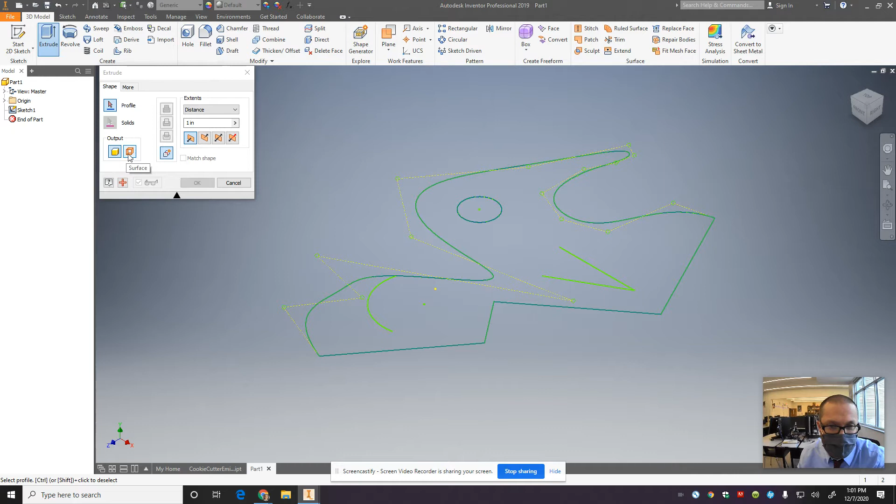So to select just the lines, you go under output to surface. This will extrude whatever it is as a surface. Once you select one line, you have to hit OK, then do the other lines. I don't think you can go back.

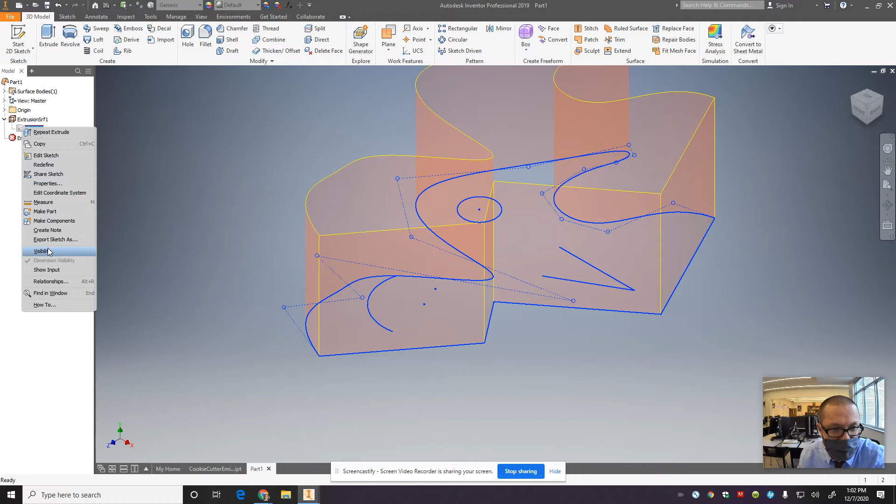But if I want them to be different heights, like let's say I want that one to be that high, I have to do them separately. And of course, your sketch disappears after the first extrusion, so you have to turn the visibility back on. Now I'm going to extrude the other one.

I'm going to do it also, because watch, when you try a solid output, it can't find those green lines because they're not closed, right? So you can select there, output as a surface, and select those lines. You have to hit the profile arrow every time you click something.

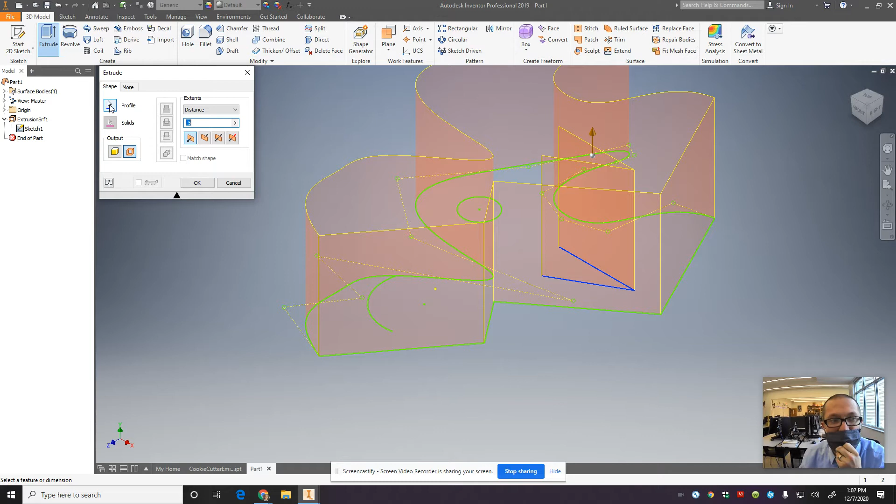Oh, it's not letting me. Is it changing it? Oh look, it's switching between them. Since they're not connected, I have to do them separately. I can only extrude one of these at a time.

That's unfortunate. So let's say I wanted to only do that one at 0.5, half height. All right, extrude here, output surface, that one, half height, hit OK.

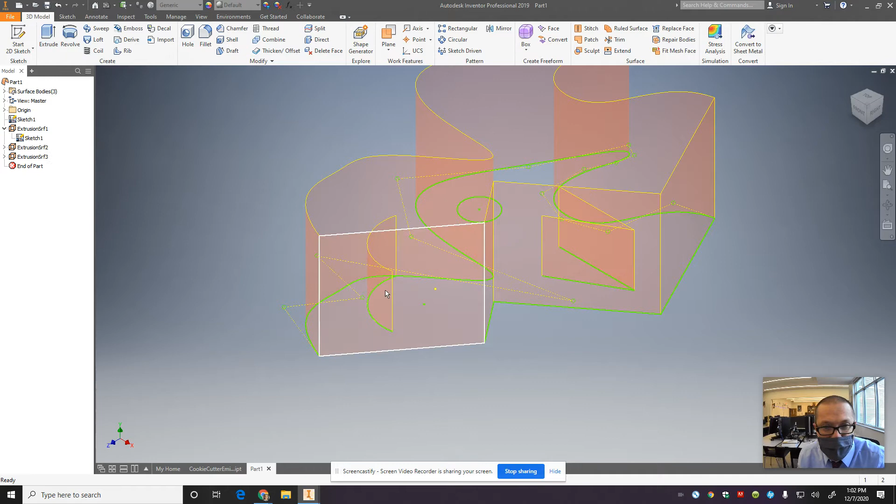So now I've done all my extrusions, let's say. Oh no, I want to get that one there too. Let's say this one I want to make taller.

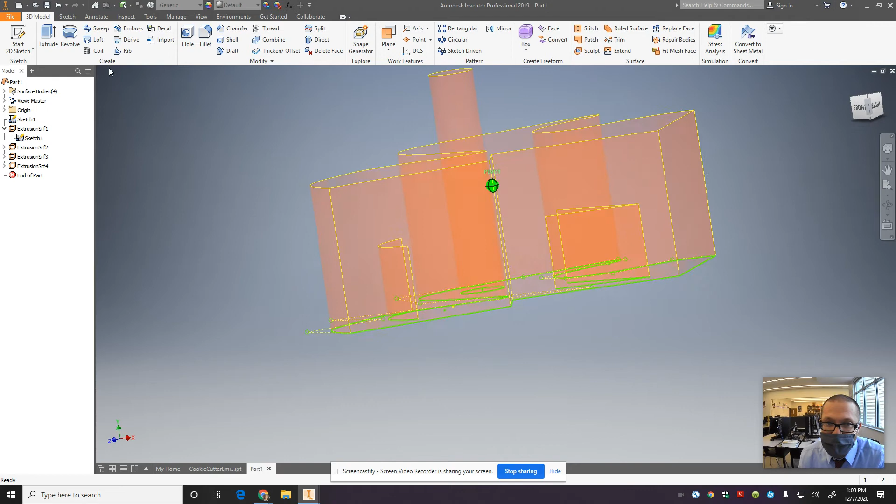A little hard to see. Now I'm going to thicken those surfaces. Right here, thicken offset, I can select. See, that's 0.1, that's too big. I'm going to make it 0.03. I can make the thicken go in, or go out from the surface, or make it symmetric about the surface.

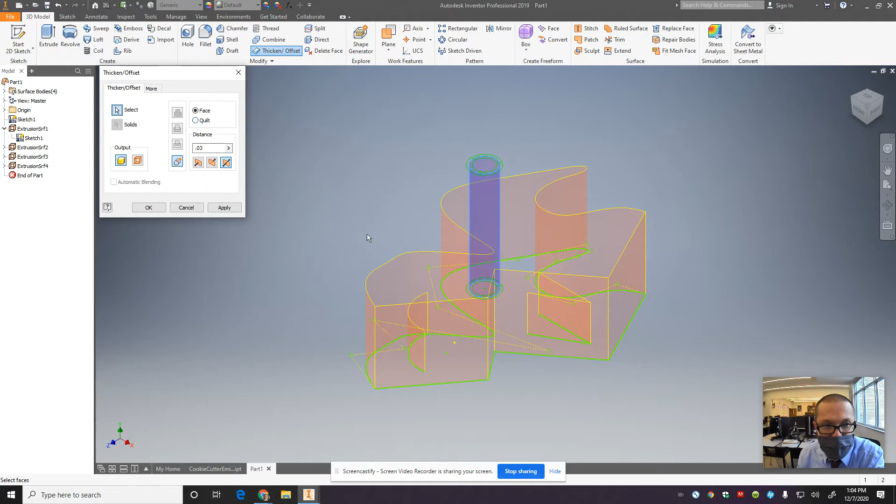Symmetric is probably good for the cookie cutter. But if you have something where you want the outside dimensions to be exact, you would want it to go in on the thicken. I don't really care for the cookie cutter. I'm going to select more if I can. It's not letting me, so I have to hit apply, then I can select more.

If they are connected, it'll let you click on them in series. All right, I don't know if you can see that or not. I couldn't, let me hit cancel real quick. I can select this big surface, but I can't click the ones in the middle because they're not connected. If you click in series, it'll connect them all.

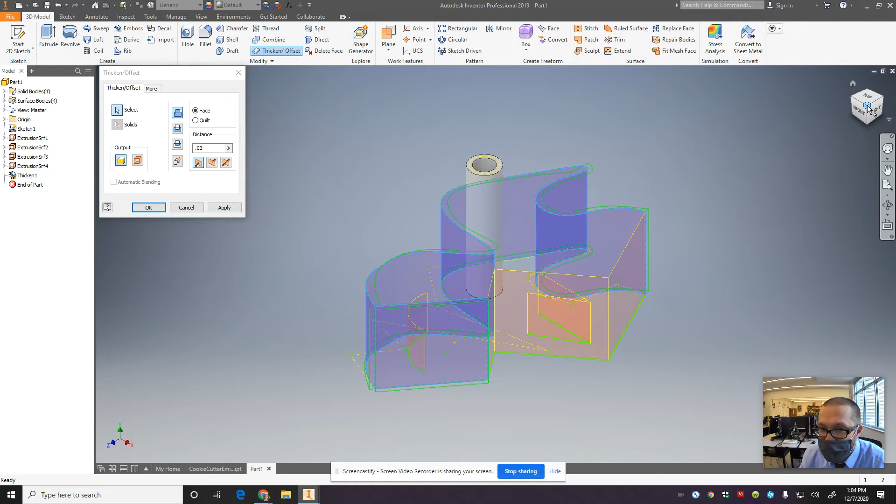It does weird stuff to that curve shape. Look at that, it's going to send it kind of strangely. I'm going to go symmetric, see if that works better. This looks like an issue here, right? It's sending it past itself. Not sure what the deal is there.

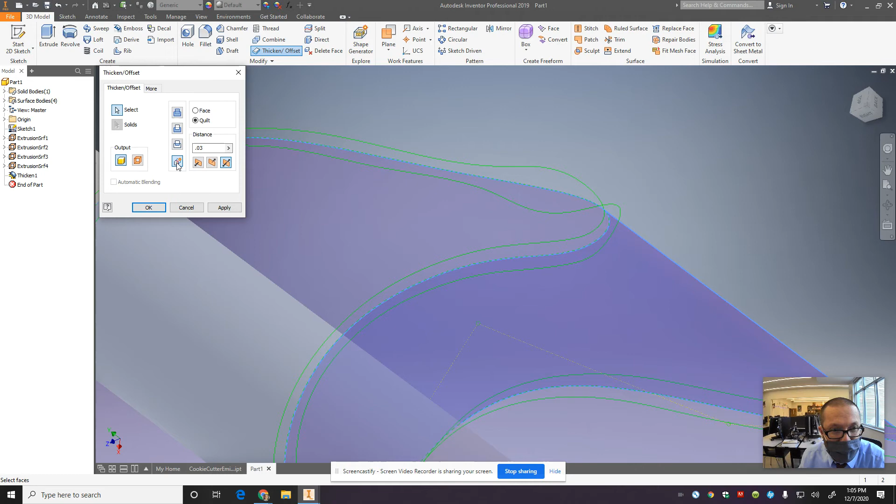Let's try quilt and see if it can do it better. No, same thing, I bet this is going to give an error. Is new solid going to be better? We'll see what happens. Quilt just detects everything that's connected, let's see if it can do it.

Yeah, see? It doesn't like that tight corner. So one thing you... Oh no, it figured it out roughly. That's good.

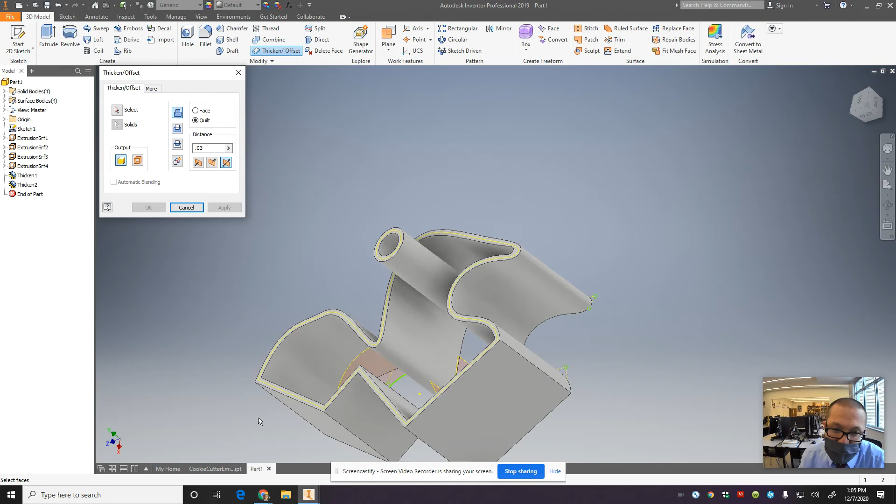And then I can hit select, and thicken these ones as well. Apply. And this one, apply. And then you can do other stuff, right?

You can try chamfering the edges of these things. That's too much, like 0.01, see what that looks like. 0.02. It's going to be something you're going to cut with, you might want... 0.01 would probably be better. Or 0.015 would make it a nice edge, I suppose.

Halfway through, will it find that edge? Ooh, it did. Holy cow. Impressive.

Let's hit apply there, though. And let's not try to get too greedy in our... see, it can't find that edge. Oh no, it did find that edge. Nice.

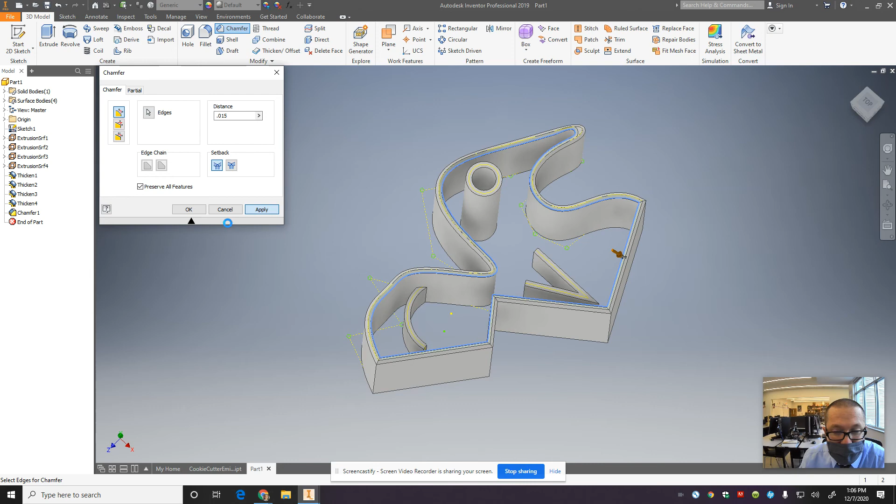Chugging, though, you guys see that? I'm clicking, it's slowing down. Wow, that fillet is tough. But chamfer, all right, that's pretty cool. So it did allow me to chamfer that edge, so now I kind of have a sharper cutting edge.

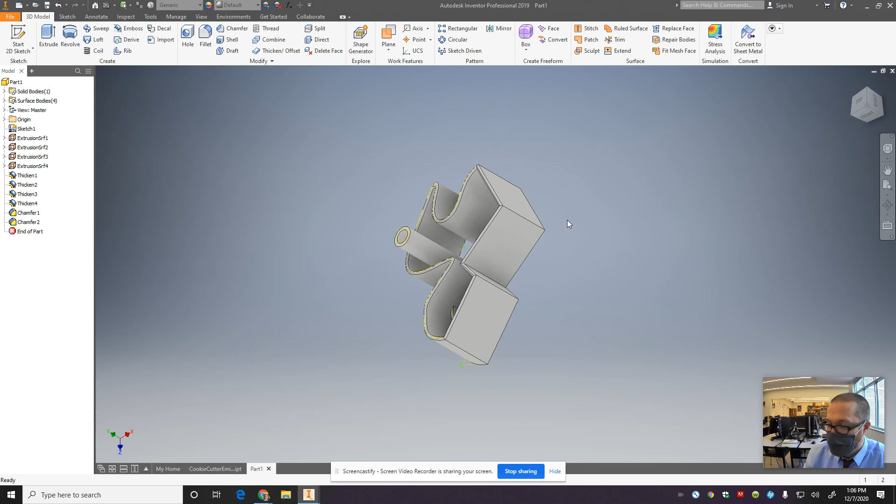Anyway, that's how you do that. You extrude it as a surface and you thicken it. There's all kinds of cool applications for this. I'll be showing you some more of that later on. We call this surface modeling. Anyhow, just a little tip and trick for you.